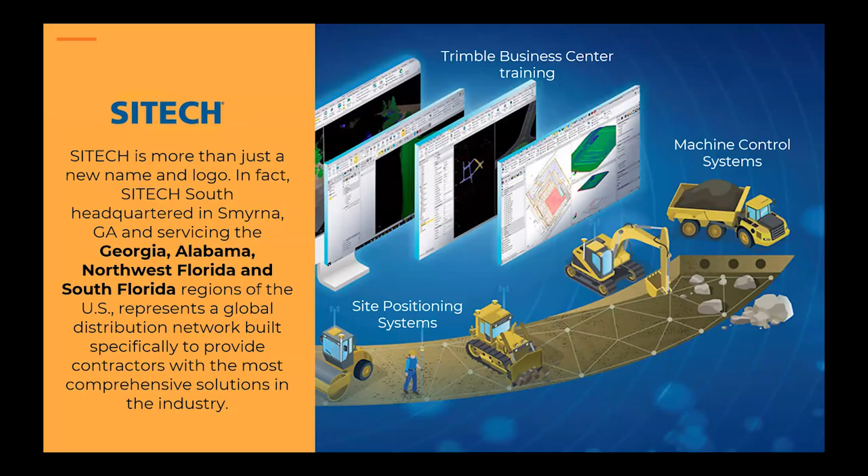So SISO is a division of Sitech, right? Sitech, our office is in Smyrna, Georgia, but we provide services in Alabama, Northwest Florida, and South Florida. So basically what we do, we provide services on SPS, or site positioning systems, machine controls, and all the construction stuff that the guys use in the field. In our case, well, we work with drones.

So I got a question for you. Whoever had experience with drones, like flying drones? Not that many. Are you sure about that? You're sure about that? Okay. Again, who had experience with drones before? Let me see. That's why I'm not a drone builder.

So, well, that was my first drone. And the only thing that we've done is basically, now we can fly a piece of paper, right? Just add a camera on it, right? Now we have a drone. I'm not gonna throw that thing. Okay. So many of us, we've been in this situation.

Back in the days, we used to do our design, survey plans and everything on a piece of paper, right? And then we switched to CAD. When we heard CAD, it was like something great. And then survey equipment. Now, drones, right? Well, even though we have drones, we need to go back sometimes to the basics, okay? So the tools that we have, they are not replacing anything. They're just matching our needs, okay?

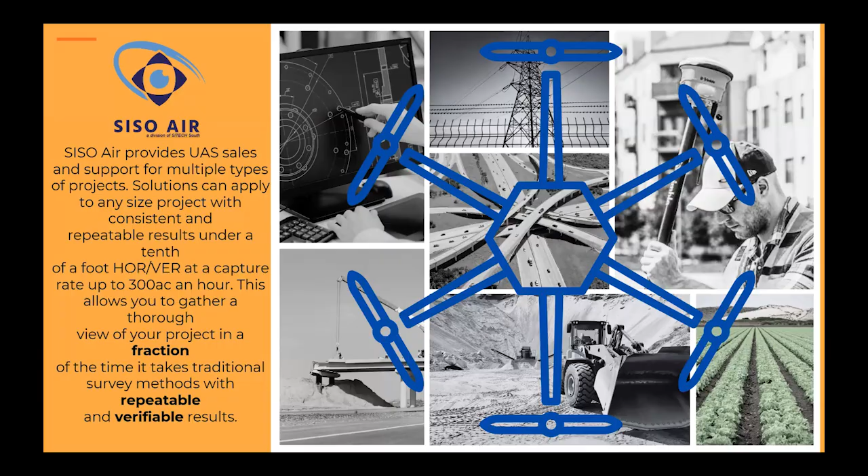So some of our customers here in Florida, Alabama, Georgia Power, some of these guys, you probably saw their logos, actually, Civil Air Patrol. So they trust our service and sales and support for their needs. Most of them are contractors, engineers, surveyors, and recently a lot of people from environmental departments are looking for that type of tool on their projects.

So when we talk about drones and SISO air, just realize that actually this number is low right now. 415,000 certified pilots. And that's a lot, right? So we're trying to do everything for them. Software integration, training, hardware, and deliverables. Why is this so important?

Because we as pilots go to the FAA website, take the test, Part 107. Yeah, you're a drone pilot. They don't teach you how to fly. I'm gonna be honest, it's weird, right? Some people, when they get a drone in their hand, they're shaking. The first time I did that, I was scared, right? Because it's a new technology. And we want to be responsible.

And then in our industry, GIS, surveying and engineering, we hear these terms every single day: photogrammetry and LiDAR. And some people are like, what is photogrammetry?

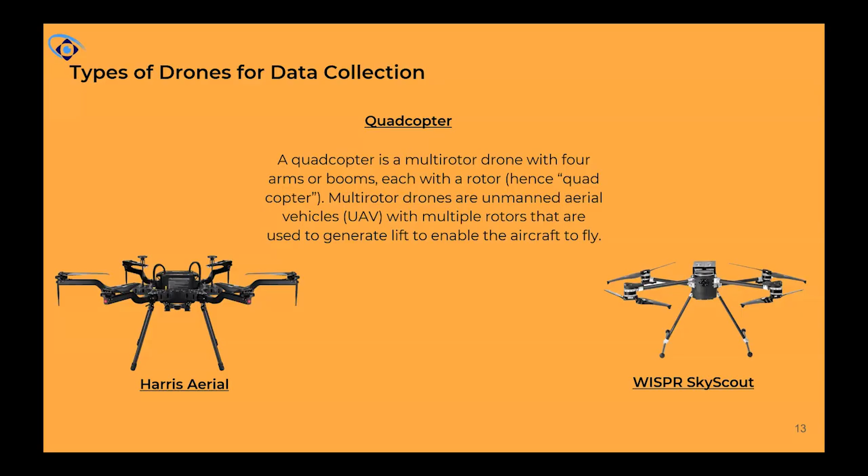Well, and then we have the quadcopter, smaller, cheaper. The benefit of the quadcopter is that you can put this kind of drone in locations where you can't fly a fixed wing. Okay, the fixed wing, you can fly however many acres in half an hour, but you cannot fly that around the building at a lower altitude because you're gonna crash. So that's the difference between both. Again, same tools for different purposes, okay?

Now, when we try to apply that data, what can we get? Well, we can use it for survey and mapping. So for project planning, construction progress, elevation maps, vegetation control, insurance, especially after the hurricane, regulatory compliance, that's one of them. But for the mining and construction industry, we can get pit and dump management, stockpile management, and all the other stuff that is related to that.

Well, what about inspections? What about infrastructure, cell towers, 3D models for bridge inspection, roofs, buildings, railroads, power lines, which even before the hurricane are a problem. Well, all that data comes from the drones, believe it or not.

And now some people, some of our customers, sorry about that, I've been talking too much all day long, and it's past 3 p.m.

Another application that we can use the drone for, we talked about that a little bit, is disaster damage assessment and management. And actually, I forgot the name of the guy this morning. They're using drones to calculate and evaluate all the damage to buildings, houses or properties instantly. They take the image from the drone and the AI software gives you all the information that you need.

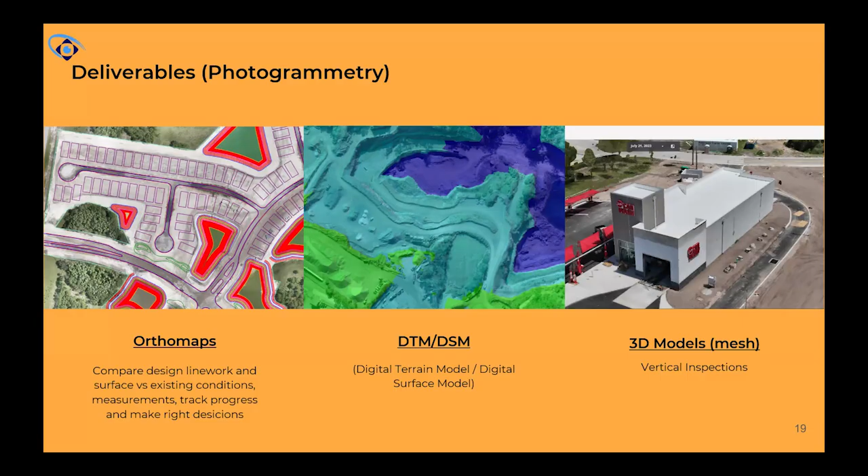And sometimes we even have to stop and talk again with the engineer saying, hey, there's a little problem here. What problem? Just a 2 foot difference in the dirt on 1,500 acres. What are we going to do? Now we can see the problems before we even have them. So this is the data that we can use to avoid those problems and a lot of headaches ahead.

Another thing that we can do, especially with photogrammetry, is track the progress of your site using the line work that we have. The engineers were working for months and months, having all these layers for the road, center line, walls, everything. But sometimes we can't see it, right? Well, if we have a tool, we go there and fly the entire project, get the existing condition. I already have my proposed design on the surface and my line work on top.

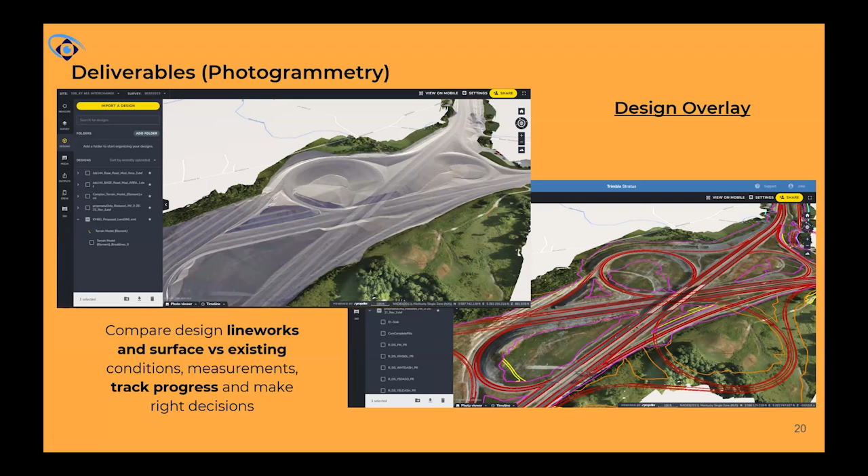So if there's any change in the design for whatever reason, that never happens, right? Well, we can visualize it, we can see how much money it's going to be, how much dirt is going to be affected, or how much money we can save or waste if we go with plan B or plan C for the design at the end of the day. So we can have this data in probably around 2 days.

Every time that I talk about this, something gets in my head. When I started doing CAD, anyone had experience with CAD, Civil 3D, something like that, right? How long does it take to do a profile? Like 5 years ago, not Civil 3D, just basic CAD. Hours, sometimes days. Profile, cross-section, by hand. The first time that I saw this, they just click. Here's your design. I almost killed myself. Why? Because I know the pain, and you know the pain, of creating a cross-section, an alignment. And when you're done, your computer freezes and you lose the CAD file. Start over again.

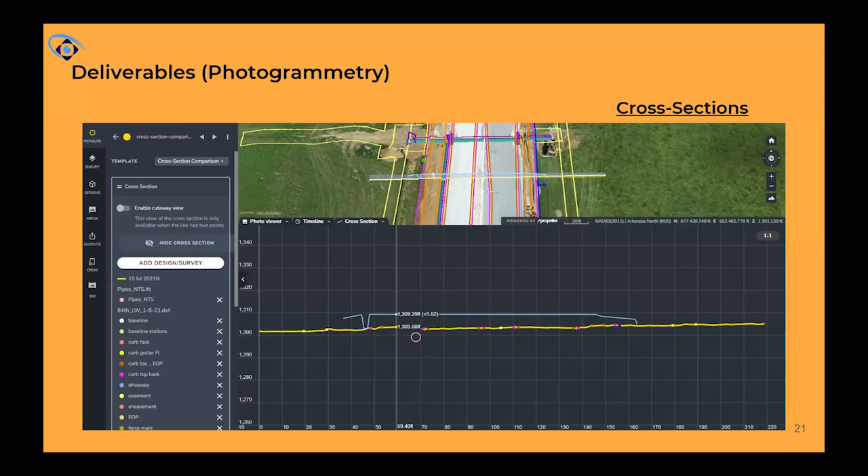Well, now with the software that we have for photogrammetry, we can use those tools even on your phone. So now we don't have to have Civil 3D or any other software installed. We can do this and verify everything the same day after we fly. Oh, wait, something's going on with my design. This part was supposed to be here. This part is supposed to be 2 foot lower. What's going on? We can see the problems faster. We don't want to have problems, obviously. But if we are in this industry, this is what we're gonna get.

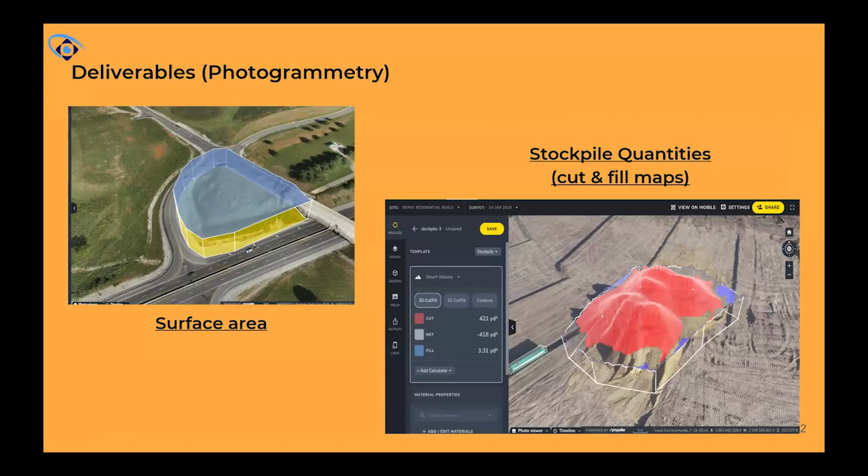And then again, we can do measurement of stockpiles and cut and fill map surface area. And we can see everything from the top, okay? And this is one of the cases. This is our customer. I used to work with them, and this is something that was published. We had an interview with them. They started this project in 2022. And in January 2024, they were able to move 2 million cubic yards.

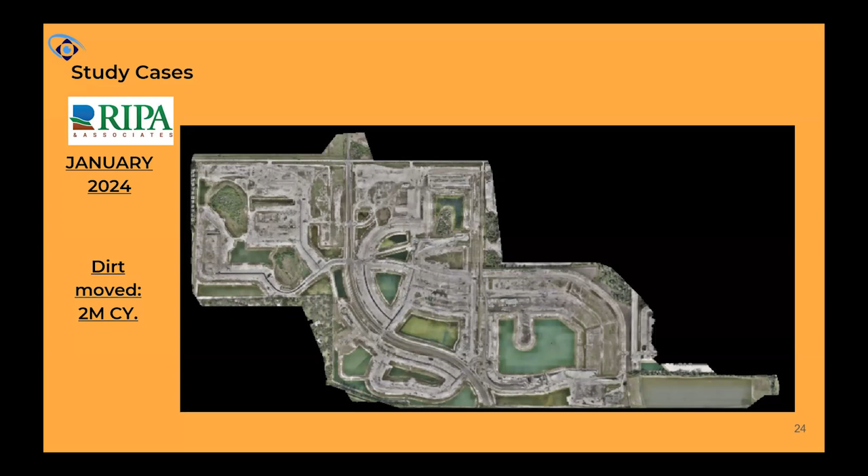Can we try to do this by hand? Just conventional survey? Do you know how many points we need to get through the entire site, basically every week? Well, they were flying it and processing the data next day. So that's how the tools that we use, it's designed for that. So let's talk a little bit about photogrammetry.

We're gonna talk about LiDAR. I'm not gonna do like a class of LiDAR here, okay? Just in case. So this is just a basic flight. Now you see it, you see the ground. How many points can you count over here? I'm gonna tell you. And now the vegetation is gone. That doesn't mean

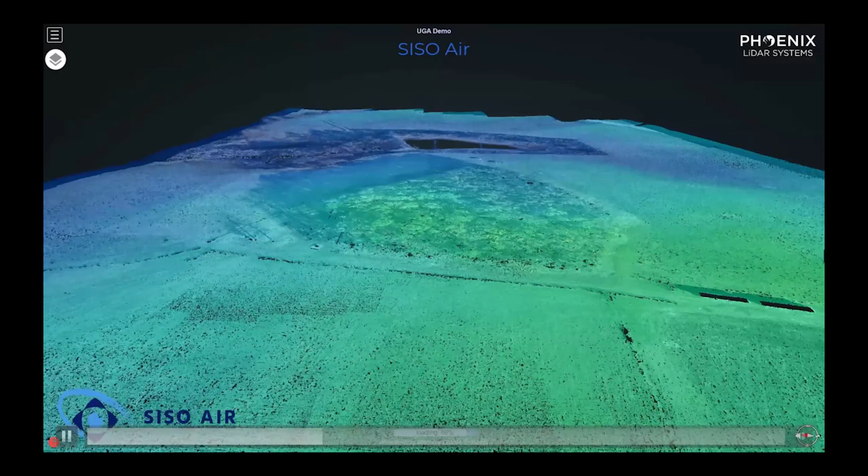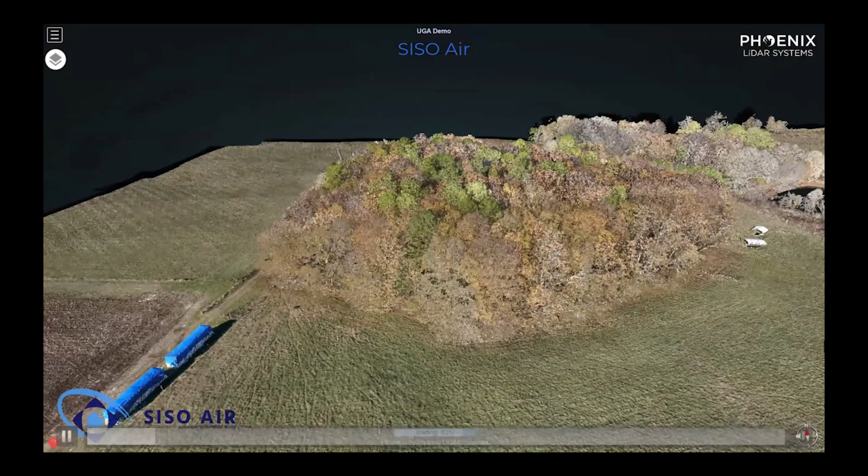when I talk about LiDAR, some people are like, oh, so I can see through the walls. No, it's not Superman. Okay. So the best way to explain this is if you're in high dense vegetation, if you're in the middle and you look up and see a little piece of the sky, the LiDAR is gonna make it. So the LiDAR is gonna see the bottom of that location.

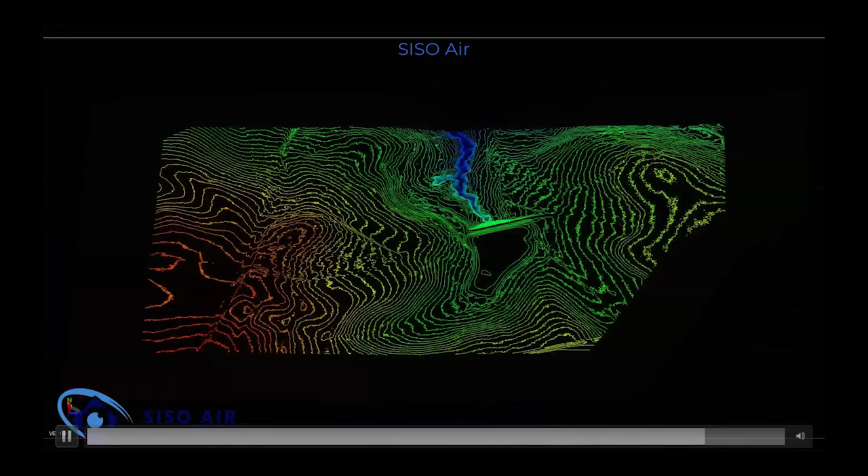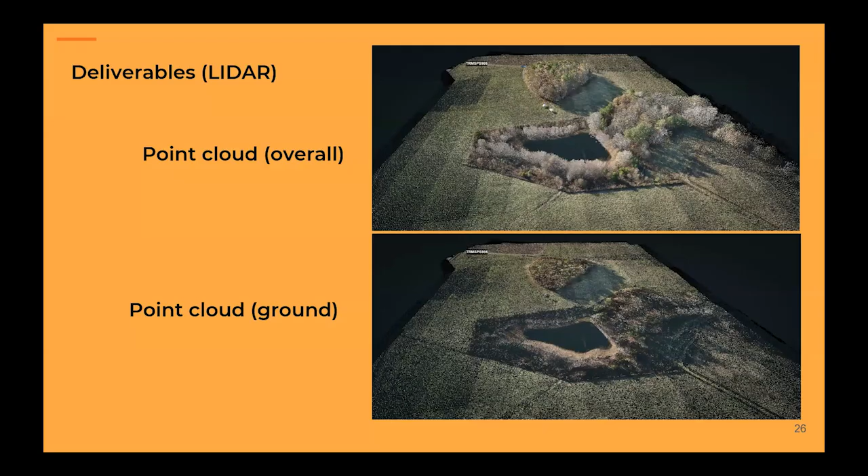Well, having a tool that allows you to filter all that information, low vegetation, high vegetation, medium vegetation, power lines, buildings, structures, in a 15 minute flight, well, that's something, right? So these are the deliverables that we can get with the LiDAR. We can get a point cloud, we can filter out the entire point cloud and just have the ground, right? Millions of points, sometimes we don't need those millions of points. We can decimate that information as well to make it easier to handle on those CAD files on our computer.

Now, digital twins, when it comes to infrastructure. It's more than 3 p.m., my brain started to crash a little bit.

So cell towers, every time that there's a storm or a hurricane, we don't care about anything. We just care about losing our internet connection on our phone because we cannot do the, how you call it, on Facebook, I'm safe, whatever. Right? Well, of course, we are worried about this type of structures. They need to be healthy. They need to be safe. They need to be evaluated, I don't know, every 6 months, every year or whatever. So they want to know how good of shape those cell towers are in based on the location, right?

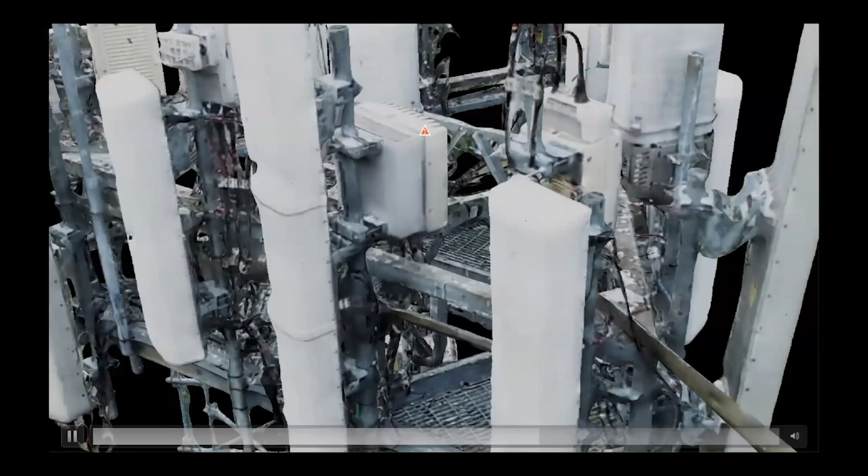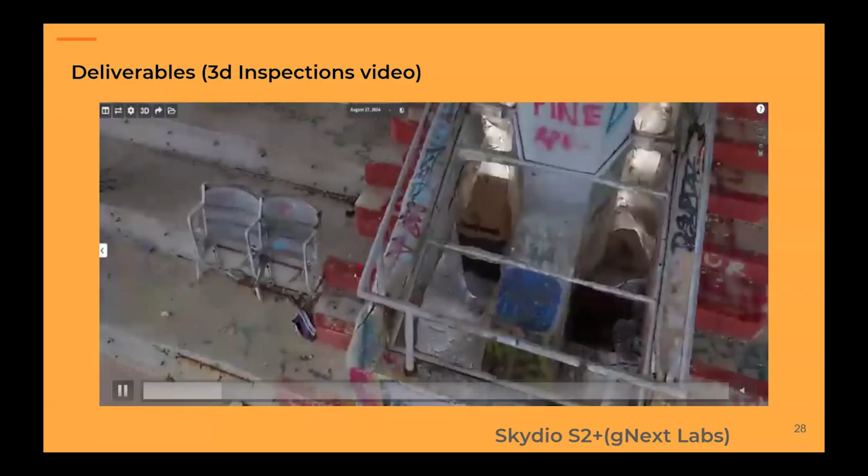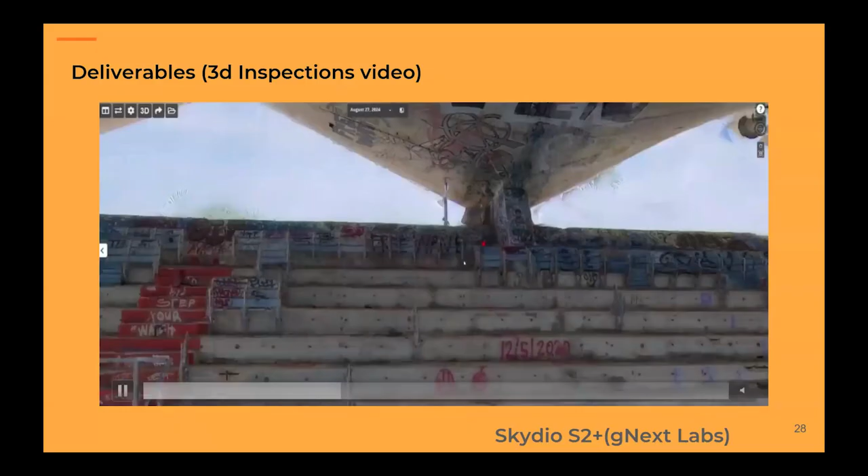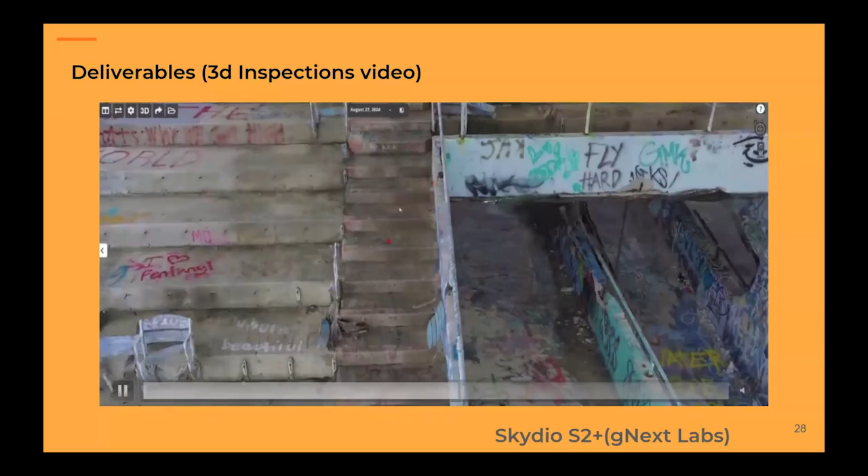Another aspect of the 3D model / digital twin is that we can see even other stuff that we don't want to see. Like this is the abandoned stadium in Miami. We were flying it, and as you can see everything. And sorry about some profanity words on this one, but this is what was done with the drone. So anyone can inspect and do measurement based on that stadium. It's too bad that it's abandoned. It's really cool, but this is the type of data we can get.

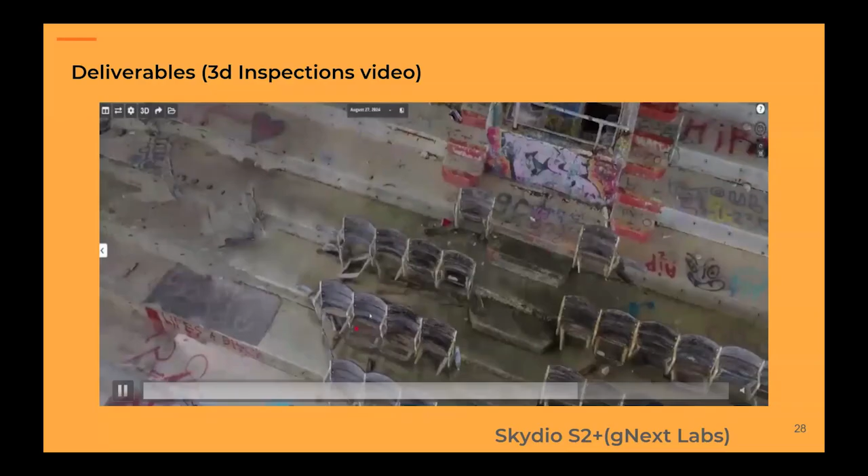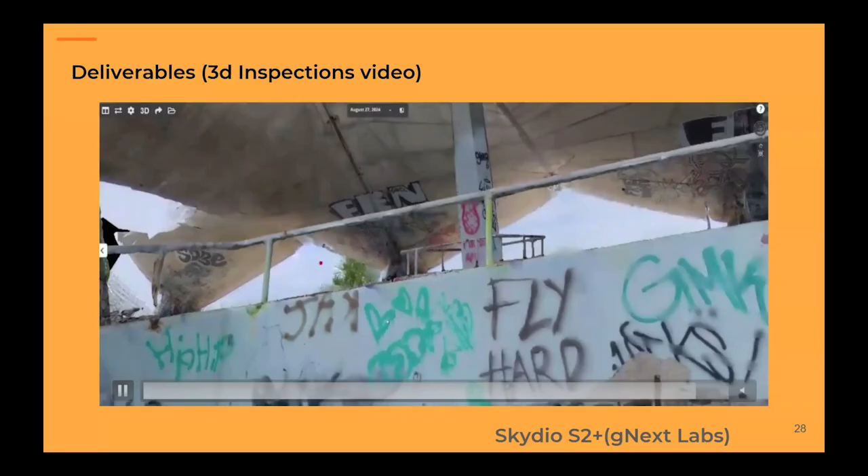And actually, that flight was around 12 minutes to generate a 3D model, an actual real life 3D model. Pretty cool, huh? It's too bad that that stadium is abandoned. Okay.

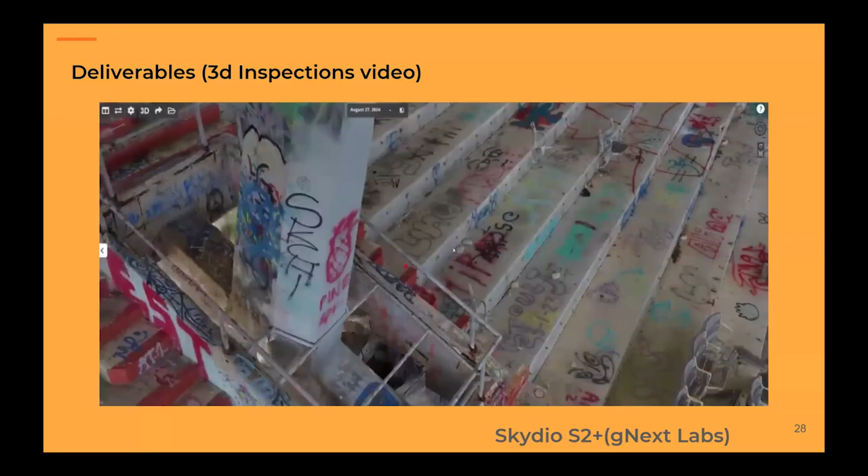Now, what type of drones can we use for that type of projects? Like this one, this is the most famous orange drone on the market. Have you ever seen this one? Right? No? Yes, no, yeah. It's like 50-50, right? Well, with that drone, you can use different payloads. Basically, fly for photogrammetry, swap the payload, put a LiDAR on it, and refly. Pretty quick. How good is that drone? Well, yes, it is like that.

731 acres, 40 meters, one set of batteries, guaranteed. And I know that because I did that one. Even myself, I was like, I can't believe it. I was like, no, that was an error. And I recalculated, and yes, it was just like that. So different tools for different projects.

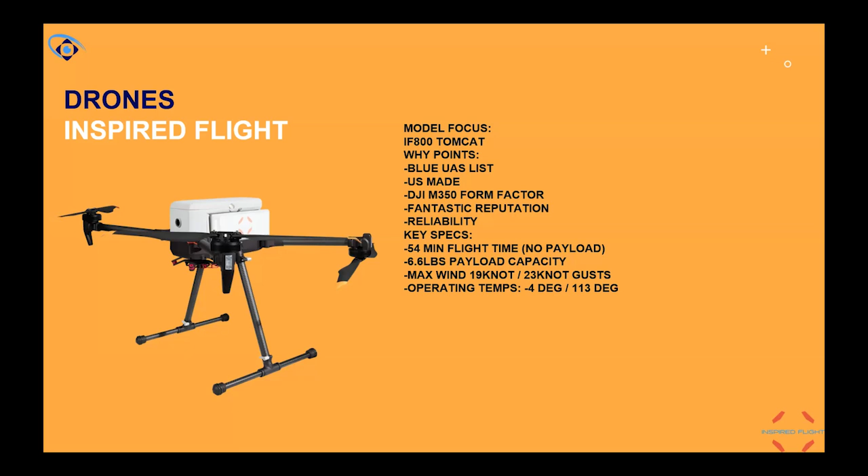Now, we might not be able to do this with this one. But we can carry some payload that you cannot carry on the fixed wing, right? You can carry up to 6.6 pounds of payload capacity with that little drone, the Inspired Flight. Quadcopter, same thing. You can swap the payload. It might be a little slower, but you can get into locations that are very, very difficult for a fixed wing.

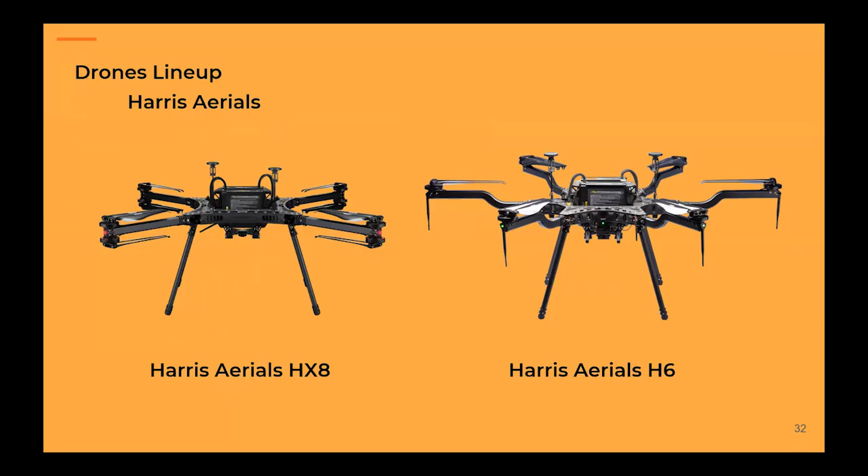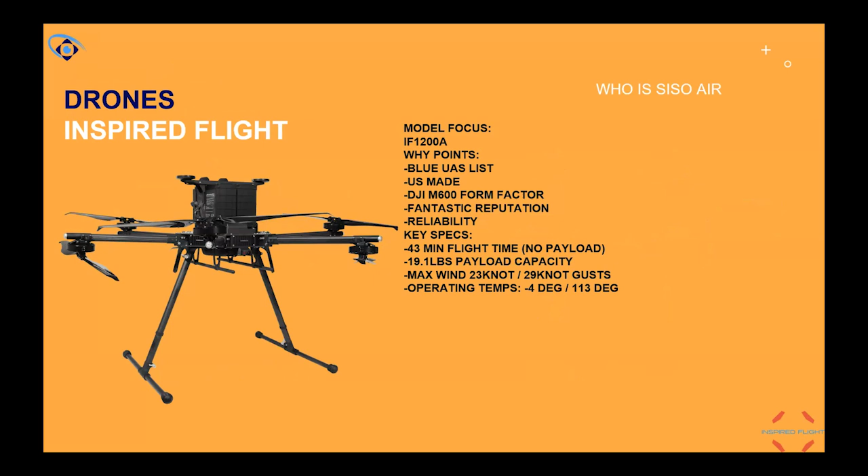And another drone that we can use is the Harris. Obviously, you can carry, I don't remember if it's up to 15 pounds or even more payload. I don't have the number. And there's one model that is hybrid. You can be flying for a couple of hours. Very nice, very interesting. And the big brother of the Inspired Flight, the IF1200A, that's the previous version. And the little one, the Skydio.

And something pretty cool about that drone, it's not only for GIS construction. The police department uses it for search and rescue because it has thermal capabilities. You can do a 3D model of the building while collecting thermal data at the same time. So you don't have to refly it twice.

So that little thing looks really small. And it has one of the scariest behaviors on drones, because you have to pray for it. When you set up your flight plan, you just click play and the drone will do what it needs to do. So you have zero control of it. Kind of scary, but it won't crash, except if you shoot it, obviously. You don't want to do that. I know you're not going to do that.

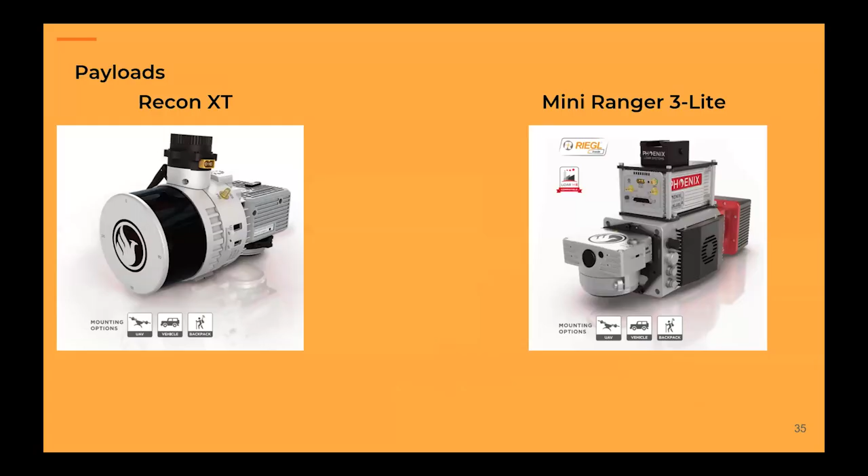Other payloads that we work with, Phoenix LiDAR system, we work with a lot of payloads. I'm not going to go through all of them. But these are some of the partnerships that we have for hardware: Wingtra, Whisper, Skydio, Inspired Flight. And then we do training on this software as well: Propeller, Pix4D, LiDAR Mill, GeneX, and so on. Those are a lot, right?

Any questions? I'm running out of time for a Friday.

Success using something like NDVI or LiDAR to distinguish between differences in plant communities, like species level? Yes. So the Wingtra has a payload that I didn't mention, a multispectral camera. I am not an agricultural guy, as you can see. But yes, you can fly. That payload has, if I am not mistaken, 6 lenses for NDVI. You can fly lower, and we have some customers using it even for bird nests.

Did I say it right? Bird nests, yeah. So if they have wetlands or some kind of nest, they can fly with that drone. We detect different colors. They can locate what they call anomalies, but they're not anomalies, they're the nests for those birds. And in some cases they are using LiDAR at the same time.